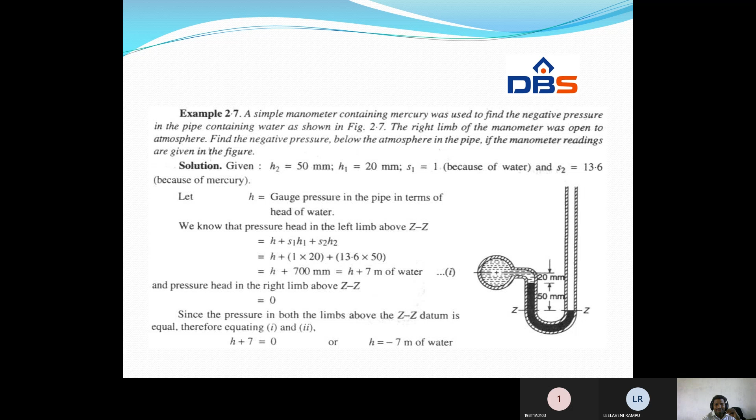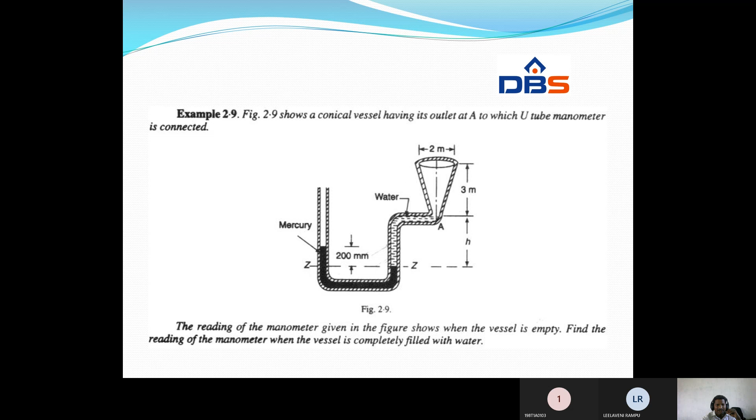The manometer reading when the vessel is empty: H2 is equal to 200 mm, that is 0.2 meter. S1 is because of the water, and S2 is 13.6 for mercury. Let H be the pressure head of the oil in terms of head of water. First, let us consider the vessel to be empty at section ZZ.

We know that pressure head in the right limb is S1 H1, equal to 1 into H, which is H meters of water. Pressure head in the left limb is S2 H2, which is 13.6 into 0.2, that is 2.72 meters of water. Since the pressure in both limbs above ZZ are equal, equating both we get H is equal to 2.72 meters.

Now consider the vessel completely filled with water. As a result, the mercury level goes down by x meters in the right limb and goes up by the same amount in the left limb. Therefore, total height of water in the right limb is x plus H plus 3, which is x plus 2.72 plus 3, giving x plus 5.72 meters. The manometer reading in this case is 0.2 plus 2x.

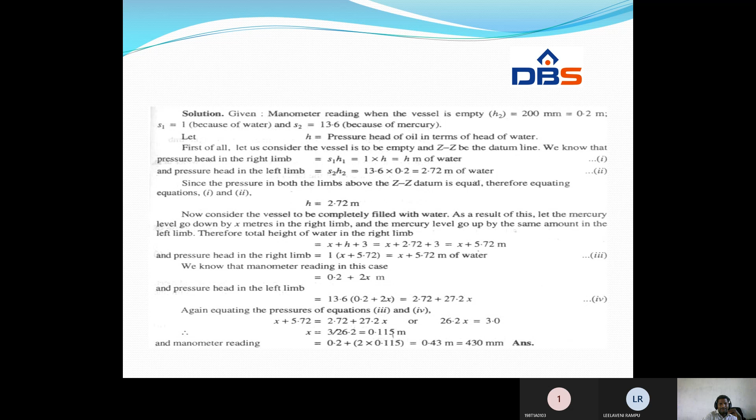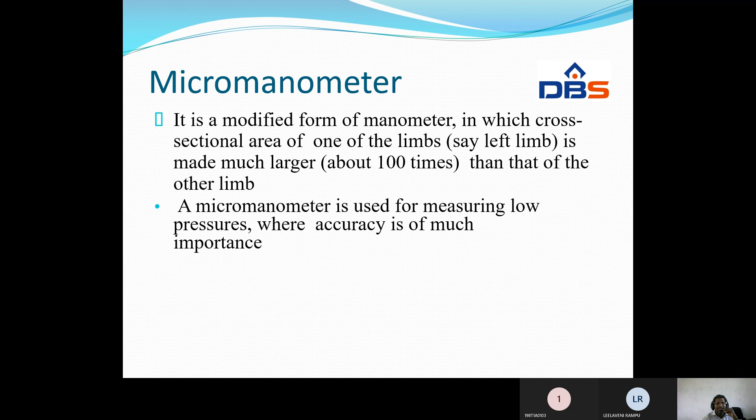There are two types of micromanometers: vertical tube micromanometer and inclined tube micromanometer.

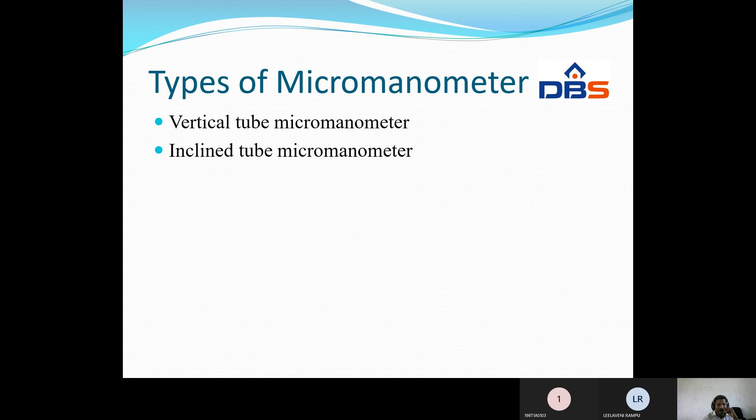Vertical tube micromanometer: consider a vertical tube micromanometer connected to a pipe containing light liquid under very high pressure. The pressure in the pipe will force the light liquid to push the heavy liquid in the basin downwards.

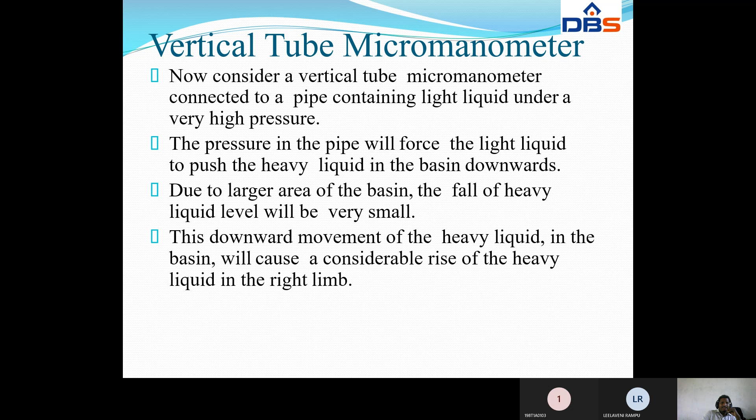Due to the larger area of the basin, the fall of heavy liquid level will be very small, because this downward movement of the heavy liquid in the basin will cause a considerable rise of the heavy liquid in the right limb.

So being water is flowing at a high pressure, what is happening? It pushes the manometric fluid to move in the right side. Right side tube diameter is very less, so it moves at a height, whereas in the left side the area is very large.

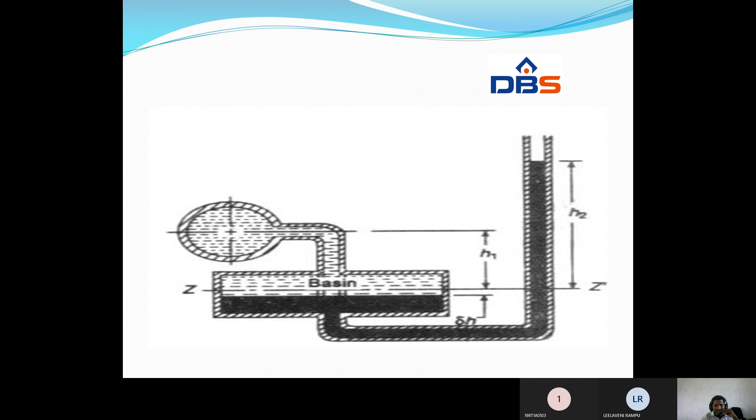Area is very big, the rise is very small. That may be represented with delta.

Let us consider datum line ZZ corresponding to the heavy liquid level before the experiment. Delta H is the fall of heavy liquid level in the basin. H2 is the height of the heavy liquid in the right limb. H is the pressure in the pipe expressed in meters of head water.

Capital A is the cross-sectional area of the basin. Small a is the cross-sectional area of the tube. S1 is the specific gravity of the light liquid. S2 is the specific gravity of the heavy liquid.

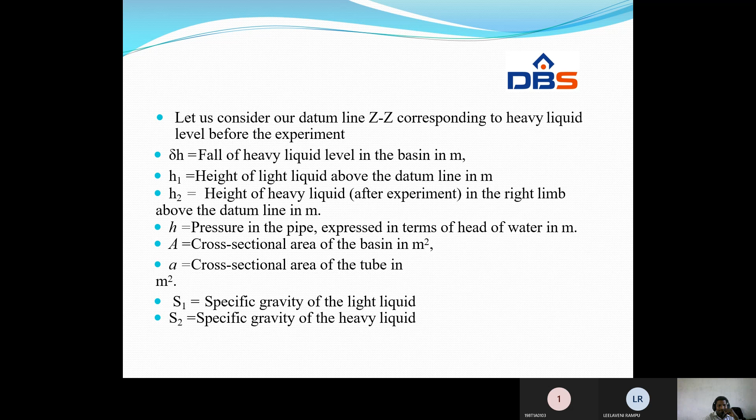So we know that the fall of heavy liquid level in the basin will cause a corresponding rise of heavy liquid level.

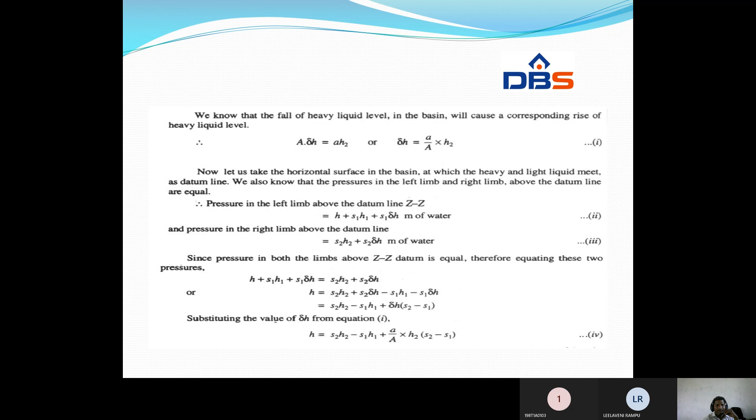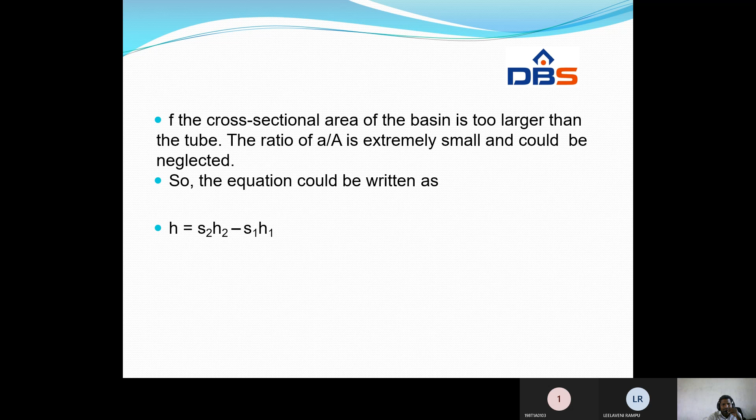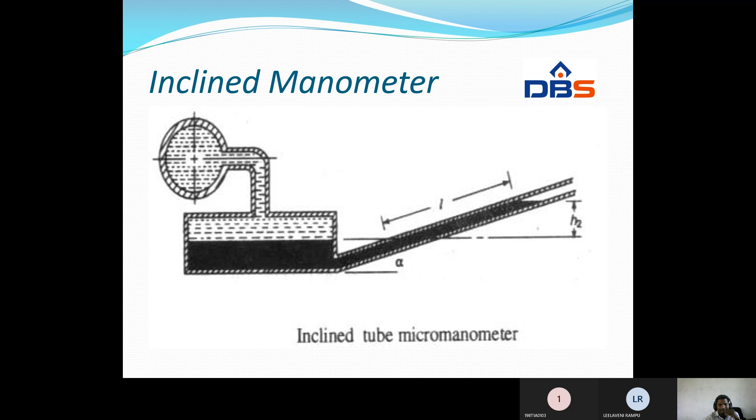This is a problem on simple micromanometer. In order to determine the pressure in a pipe containing liquid of specific gravity 0.8, a micromanometer was used. The ratio of area of the basin to that of the limb is 50. Find the intensity of pressure in the pipe for the manometer reading as shown in the figure.

The height of the column of the manometric fluid in the right limb is 200 mm, and the height of the light liquid in the left limb is 100 mm.

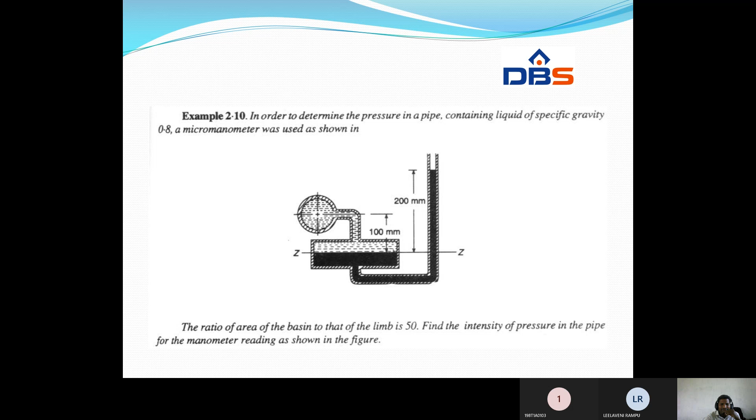What is the data given? S1 is equal to 0.8, capital A by small a is equal to 50, H1 is equal to 100 mm, H2 is equal to 200 mm, and S2 is equal to 13.6 for mercury.

We know that the pressure head in the left limb above ZZ is equal to H plus S1 H1 plus small a by A into S1 H2. This equation we derived in the previous slide.

H plus S1 is 0.8, H1 is 100, plus 1 by 50 since capital A by a is equal to 50, so small a by capital A is 1 by 50, into S1 0.8, H2 200. If you simplify it, we get H plus 83.2 millimeters of water.

And the pressure head in the right limb is S2 H2 plus small a by capital A into S2 H2, that is equal to 13.6 into 200 plus 1 by 50 into 13.6 into 200.

Since the pressure in both limbs above the ZZ datum is equal, we equate these two equations. So H plus 83 is equal to 2774.4. Finally we get H as 2.6912 meters of water. So this height of the liquid column we got it.

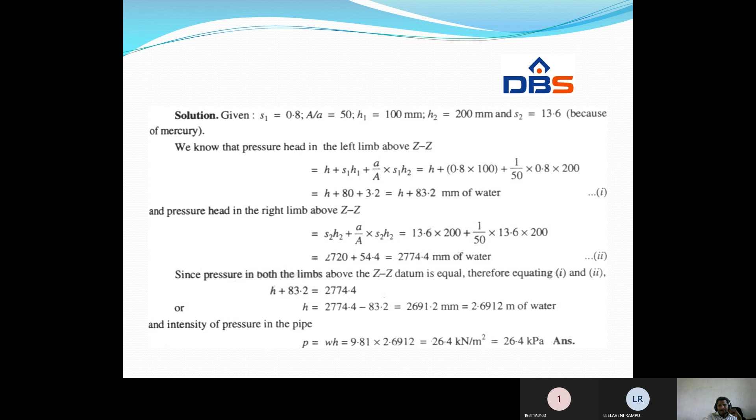2691.2, simplify it, we get 264... W is rho G, rho is equal to 1000, G is 9.81, and this pressure is directly written. So this value into 1000 we will get, and 1000 can be written as kilo. Therefore 26.4 kilonewton per meter square, or 26.4 kilopascal. Like that we can express.

One more thing, differential manometer. This device is used for measuring pressure between two points of a pipe, or two different pipes. There are two different pipes, and we are measuring the pressure difference between these two pipes. That is why this manometer is called a differential manometer.

Let us take the horizontal surface ZZ, at which the heavy liquid and light liquid meet in the left limb. H is the difference of the levels of heavy liquid in the right and left limb, known as the reading of the differential manometer. HA is the pressure head in pipe A, HB is the pressure head in pipe B. S1 is the specific gravity of the liquid in the pipes, and S2 is the specific gravity of the heavy liquid.

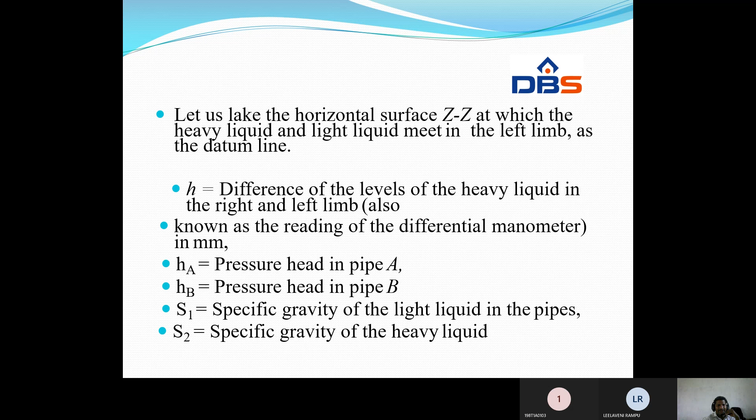We know that the pressure head in the left limb is HA plus S1 into capital H plus small h, that is HA plus S1H plus S1 small h. Assume it as equation 1.

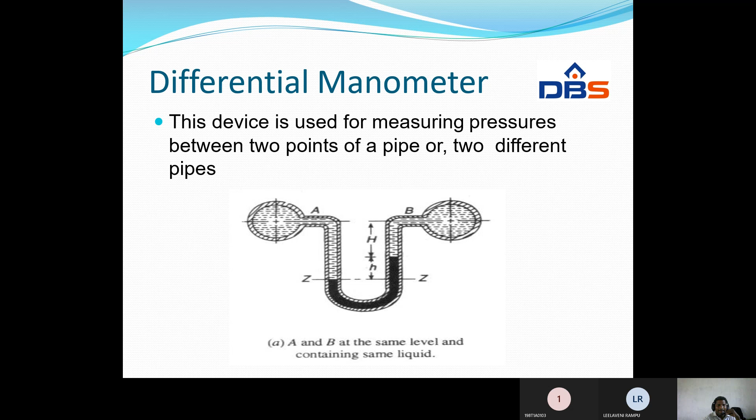And the pressure head in the right limb is equal to HB plus S1H plus S2H. HB, pressure in pipe B, is HB plus S1H plus S2H. In this way we have to represent it.

Pressure head in both limbs above the datum ZZ is the same. So HA plus S1H plus S1 capital H plus S1 small h is equal to HB plus S1H plus S2H. Here S1H gets cancelled. So HA minus HB is equal to S2H minus S1H. H is same, so HA minus HB is equal to H into S1 minus S2. In this way we find the pressure difference between the two pipes.

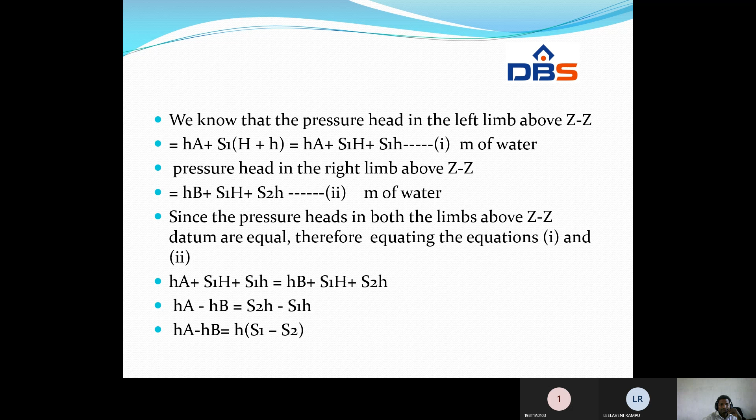Now consider a differential manometer whose two ends are connected to two different pipes A and B, containing different liquids at different levels. Let us assume the pressure at point A is more than at B. A little consideration will show that the greater pressure at A will force the heavy liquid to move downwards. This downward movement of the liquid in the left limb will cause a corresponding rise of the heavy liquid in the right limb. The horizontal surface at which heavy and light liquids meet in the left limb is taken as the datum line. In this case, let ZZ be the datum line.

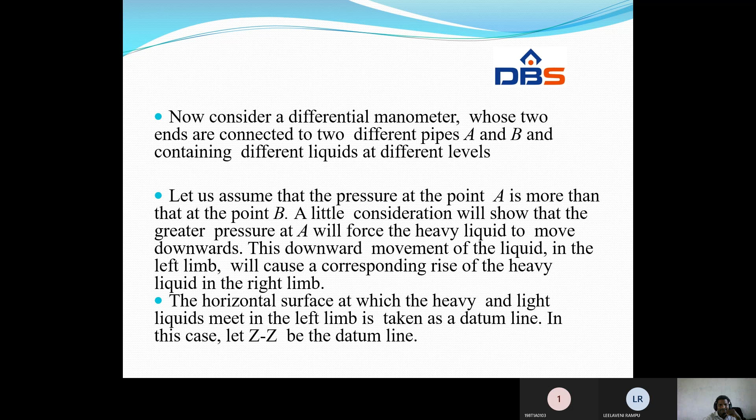This is a different case. These two pipes are at different levels. So we can measure the pressure difference using a differential manometer at the same level or at different level pipes.

Let H1 be the height of the liquid in the left limb above the datum line, H2 be the difference of the heavy liquid in the right limb and left limb, and H3 be the height of the liquid in the right limb above the datum line. HA is the pressure head in pipe A, HB is the pressure head in pipe B. S1 is the specific gravity of the liquid in the left pipe, S2 is the specific gravity of the heavy liquid, and S3 is the specific gravity of the liquid in the right pipe, pipe B.

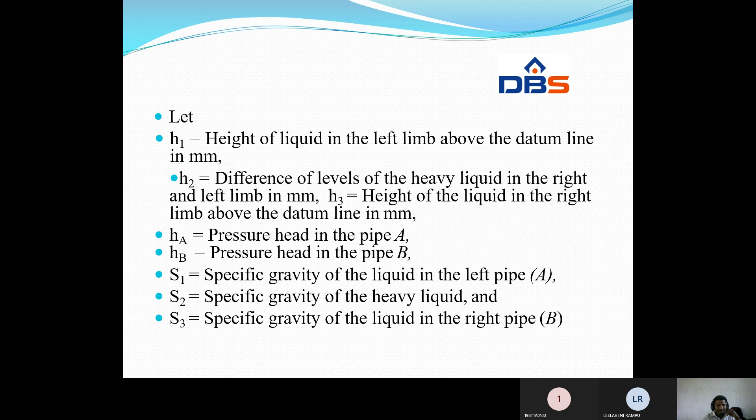So once again, H1 is the height of the liquid present in the left limb, H2 is the height of the manometric fluid, and H3 is the height of the column present in the right limb, or liquid pipe B column. HA is the pressure head in pipe A, HB is the pressure head in pipe B.

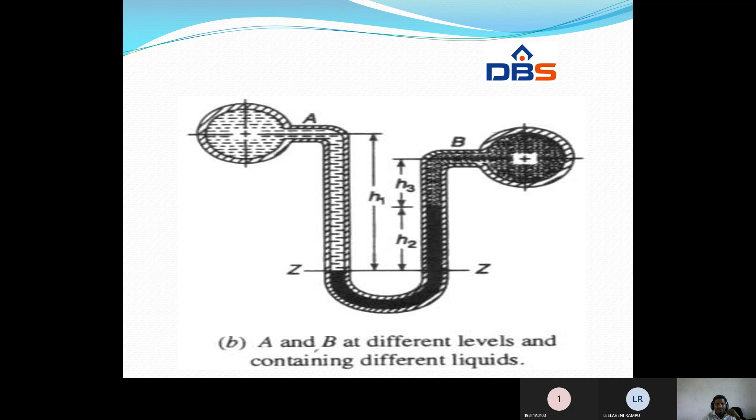We know that the pressure in the left limb above the datum is HA plus S1H1, and the pressure in the right limb above the datum ZZ is S2H2 plus S3H3 plus HB. By equating these two, we get HA plus S1H1 is equal to S2H2 plus S3H3 plus HB. So pressure difference HA minus HB is equal to S2H2 plus S3H3 minus S1H1. In this way we determine the pressure difference between two different pipes.